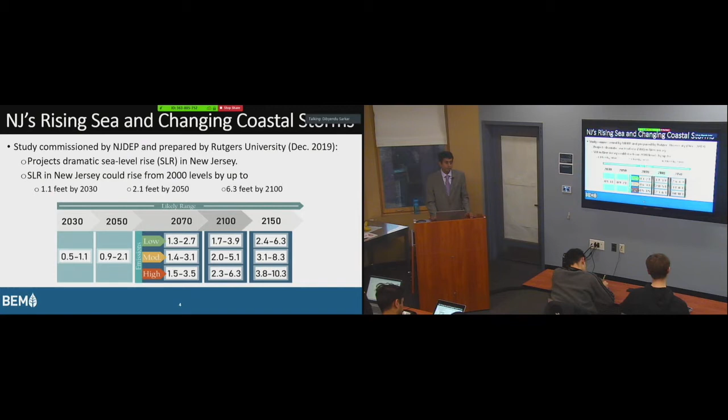Now this report would become a basis of any resiliency regulations or even the PACT regulations coming out. So if you don't have it, you can Google this report, all of these EOs or anything, and you can review it. It's a good forward-looking projection of what the state would face, all the way till 2150.

Similar to New York City, across the street, they have their own New York City Panel on Climate Change. They published the report in 2015 and updated it in 2019. They look at around 100 miles around the city, so all this area, northern New Jersey, gets covered. They are projecting a similar type of increase in sea level rise, and you can see the precipitation increasing by 15%, 19%. So if you are increasing rain by 15%, definitely you're going to see an inverse of less snow. And the numbers are a little bit off inches-wise.

This is also a continuously evolving science, so it's not set in stone. Every 4 years the IPCC, as you may all know, publishes the whole global report for climate change, and every 4 or 5 years things get updated. And the photograph I have is the damage. I don't know if anybody has taken the train at Hoboken. This is how it got damaged in Sandy. So some of the photos you'll be seeing are from Sandy.

What I wanted to cover is from a transportation standpoint, from trains, buses, bridges. Obviously we have a federal government that is not keen on climate change right now, but this is from the previous couple of administrations. They would still publish research documents or reports with a similar conclusion, saying it's very likely that the rain is going to increase by 90%. But if you look at the sea level, they are virtually certain, 99%, that we're going to have a sea level rise that's going to affect transportation infrastructure, from the tunnels to bridges to any other thing. Same with the hurricanes and the heat days.

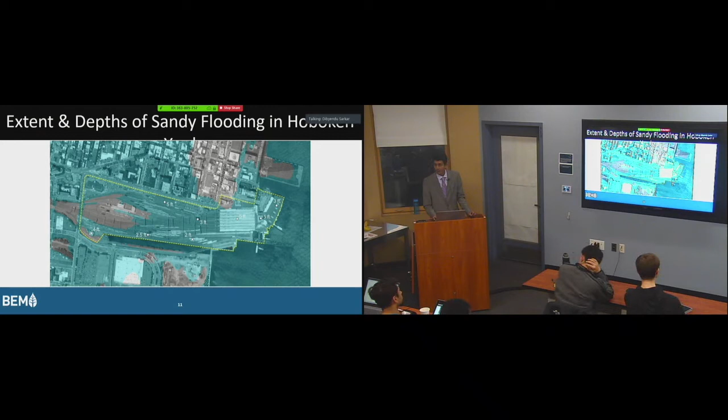So I'm going to now pivot to how an agency like New Jersey Transit protects their assets. Sandy came in, there was a lot of damage, they got federal money, so they are doing a bunch of projects in Hoboken to make sure they don't flood again. Because from a federal government standpoint, they don't want to give you money for the same thing again and again. Even though folks may not believe in climate change at the federal level, when the funding comes, it comes with some strings attached. So you can't call it climate change, but it's a different color.

So I'm going to go through a couple of projects, just to give you an example of how New Jersey Transit does it.

What happened? It skipped. Yeah, it was over here. Okay.

So this is how New Jersey Transit manages it after Sandy. They developed their design criteria. FEMA, the Federal Emergency Management Agency, publishes the flood maps for the whole country, so you use that. They generally publish it for either a 100-year storm or a 500-year. In certain low-lying areas, it would be in a 500-year. A 100-year storm is a 1% chance of happening in any year, and a 500-year elevation would be 0.2%.

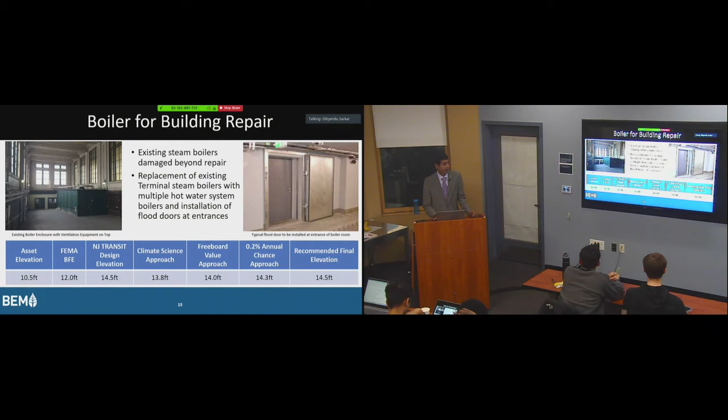So the design option they would select is, on the picture on the right, let's just build a watertight entrance door so that if a storm is coming, we can close it and block it, and even if the outside floods, the water would not get in. So that is how the designers would find options to work. Not everything can be raised up and protected.

Similar to this, all over the Hoboken yard, you can see there are all these transformers. Their elevation is already somewhere between 6 to 10 feet, and we need to get it to 14.5 feet. So a lot of the time the designers would say, we have a catenary running, we'll just move all of this to a higher elevation, and you can see they'll design it and put it on the existing poles, or install new poles and raise them.

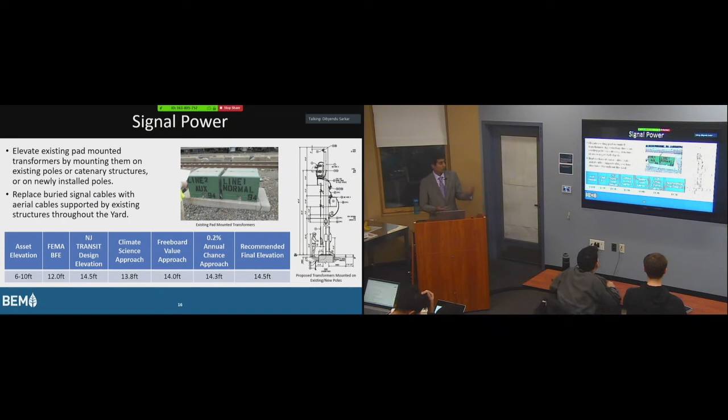So even though Hoboken is flooded in future, if that 5 feet of water we saw during Sandy comes, let it flood; we can shut down our electric supply, but after the storm is gone, we can quickly get back to running the trains.

This is another one; you can't see the design over here, but this one was a substation, and this is the design. A lot of the times they'll just build a structure and say we're going to raise it to get to 14.5 feet and let people take steps to do the maintenance of the substation. I have a better picture down further. And you can see it's the same calculation you are doing for every asset. Some things change, some don't.

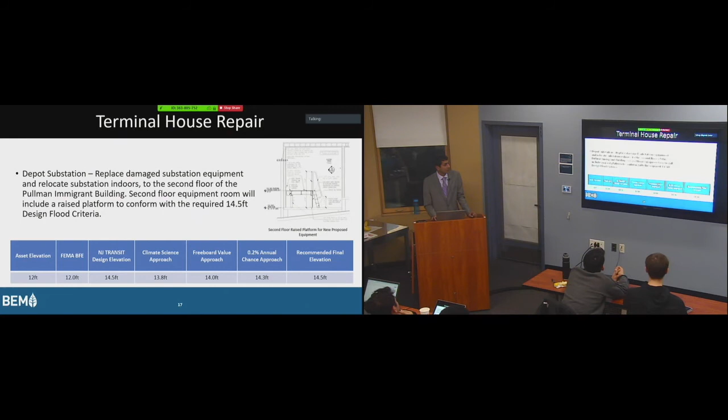So this is one of the, I think you can see it from the road, this building. This is one of the archaeological SHPO buildings. So they are changing this Observer Highway substation, and you can see on the design on the right, they are basically raising it. They'll do piles and build a foundation and raise up the whole thing, like when you go down the shore, the houses that are elevated.

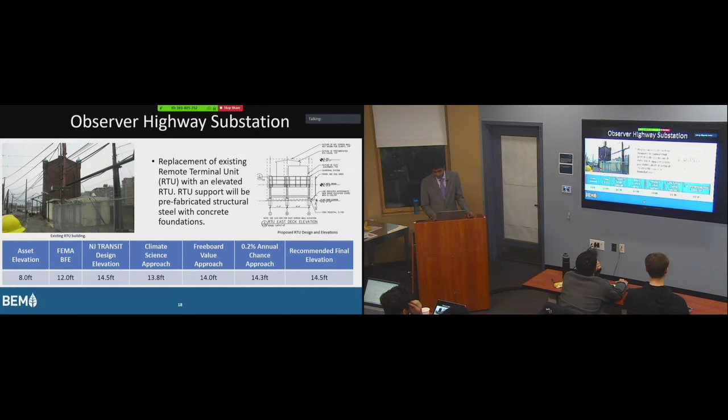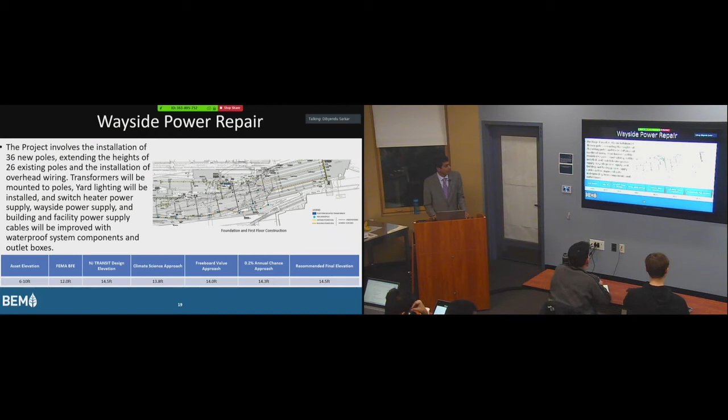Another thing is they have so many assets all over the Hoboken Yard. Hoboken Yard is 50 acres, so there are a lot of assets that have potential to flood. So they'll say, okay, what can we move, on the poles, can we eliminate some of them, or can we create underground waterproof trenches and conduits so that outside can flood but the water would not get in. You can see all the existing projects going on where they are raising it from 6 to 10 to 14.5.

This is another way. This is a train wash area. It's on the other side where the Newport development is. You can see the door. The door has all the electronics to operate the train wash, and it needs to be raised to 14.5. So another option is, let's just raise the whole door up, and you can see it in the picture. So they'll build the steps, reconfigure the door entrance, and then inside you go down the steps again. But at least your asset is now protected.

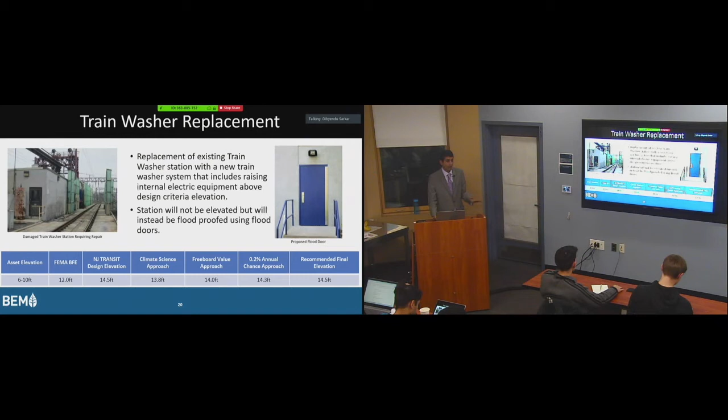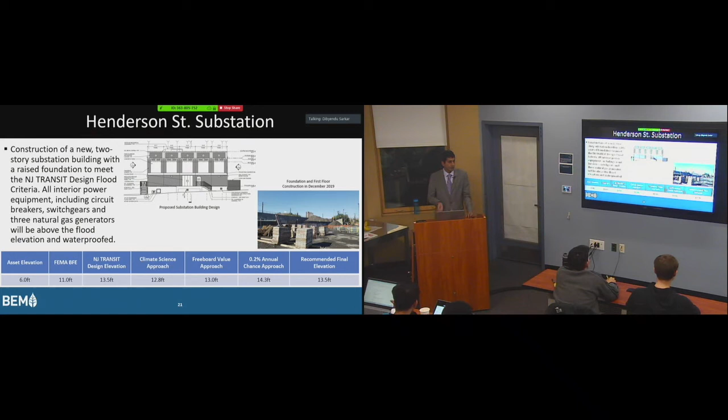This is all the way on the other side. I think it's Observer Highway, or no, Marin Boulevard. They'll raise it to 13.5. The construction is ongoing right now. So the whole substation would be elevated, and all the transformers inside would be at a higher elevation, and for the basement they just have to go in during the storm, open up the windows and let the water run in and out.

Another thing Transit has done, we worked on this with Stevens at Davidson Lab. They built an emergency warning system to notify and protect their assets when a storm is coming. We worked with Stevens on this project a couple of years ago. You observe, across the river from the Battery and other locations, the hydrograph, which is 84 hours before, telling you how much water you're going to get.

You ingest it and tie that to the critical assets, because you already know their elevation. This is just an example: red is anything in that area that would be flooding, yellow has a potential to flood, and green is protected. This is a warning system New Jersey Transit uses in real time, because they can't shut down the whole train system in one day because of the commuters using the system, like if you want to go home from Stevens, so they have to curtail the service.

So to curtail the service, that's why those green and yellow areas are. They can say, we're going to have a couple of tracks open, but we're going to close this thing out because this thing's going to flood before. And a lot of the equipment they have at Hoboken is analog. They have big switches from 100 years ago that there are no parts available for. All the companies are gone, so they handmade those parts.